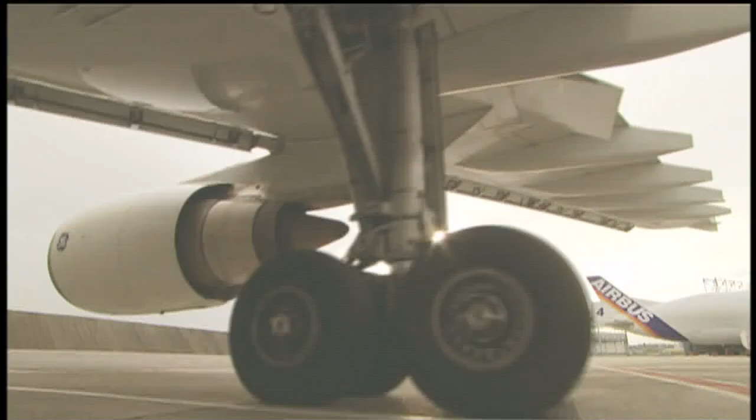For me, all airplanes are fascinating machines. So being in on the birth of one of the most amazing planes ever conceived is a real dream come true. Get ready for a hair-raising story of ocean-going ships, 96-wheeled trucks, and a flying monster called the Beluga. The latest technology at the mercy of the winds, the tides, and a tape measure. Are you ready for takeoff? Then here we go.

Imagine an airplane that holds almost 600 people. Imagine an airplane with space for showers, stores, and bars. Imagine an airplane that could change air travel forever. Get ready, because that dream is about to come true.

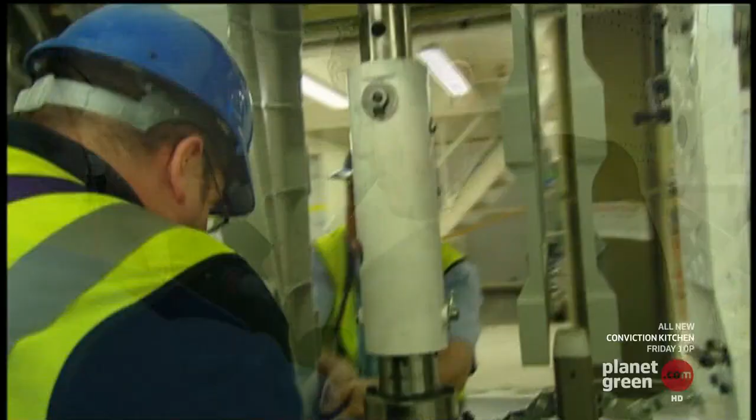This is the inside story of a multi-billion-dollar gamble. A game of high stakes, high technology, big machines, gigantic buildings. The creation of a new breed of airplane, bigger, more powerful, more luxurious than anything you've ever seen. A battle for the skies.

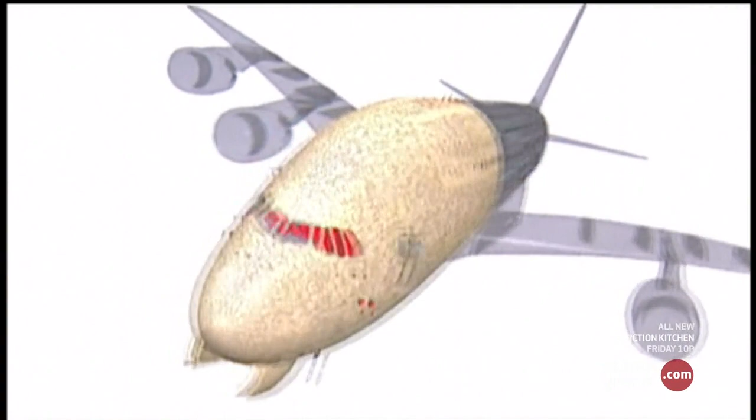The Paris Air Show, France, June 2003. For people who build airplanes, it's the most important event of the year. Far away from the sweating crowds and the spinning stunt planes, one man walks through the VIP area. His name is Charles Champion. On his shoulders rests the fate of the company known as Airbus. What is at stake, I would say, with such a program is basically the future of the company, as such. Really? Really.

Just two companies produce almost all of the world's large airliners. One is Airbus, and the other is Boeing. The two have been locked in a deadly battle for years. Now Airbus want to overshadow Boeing's entire product range and build a machine that will make the legendary 747, the jumbo jet, obsolete.

This is John Leahy. He's got the tough job of selling 250 planes at $265 million each. And that's just to break even. Pressure? Of course there's pressure. When you're spending $10.7 billion, of course there's pressure. When you're designing an aircraft that's bigger than any that was ever produced in the history of mankind, of course there's pressure.

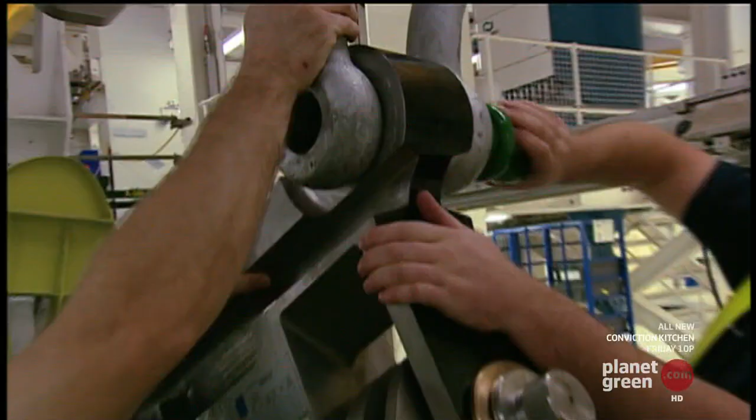They've set a tough schedule. Just 20 months till the first takeoff of the biggest airliner in history. A year and a half of pressure, stress, and sleepless nights. Witness the first installment of this incredible challenge. The race to build the enormous parts for the new machine, carry them thousands of miles across oceans, along rivers, over land, to where they'll finally be assembled. There's just 87 weeks till the big bird flies.

Broughton, Great Britain, November 2003. It's 6:30 in the morning. Inside this brand new factory, Simon Shingler and his team are about to venture into the unknown. I don't want anyone to get complacent. We need to make sure we're concentrating on what we're doing, or else there will be a likelihood we'll bend something or hurt someone. We can't afford for that.

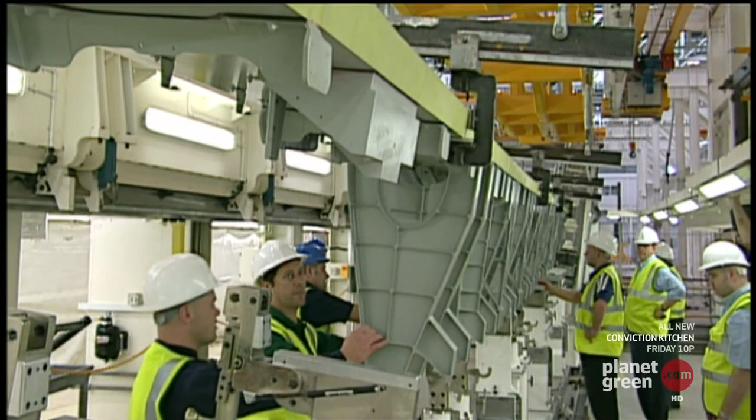Here, over the last 5 months, more than 350 engineers have been working day and night, constructing the world's largest airliner wing. 119 feet long, it's been painstakingly built up lying on its back edge. It looks more like a ship than part of a plane. High-capacity, radio-controlled cranes are used to maneuver the components into position.

Today is the day they lift the complete wing free of its supporting framework and get the chance to see the entire enormous structure for the first time. What's going on in front of you? The whole idea of having you all there is to make sure that you're all concentrating on your one specific station, right? And that's how we're going to ensure that we're going to take this wing out without anyone hurting themselves or without the components getting damaged.

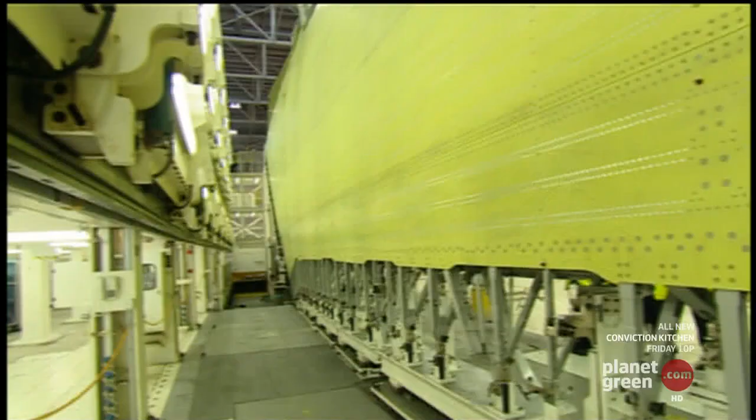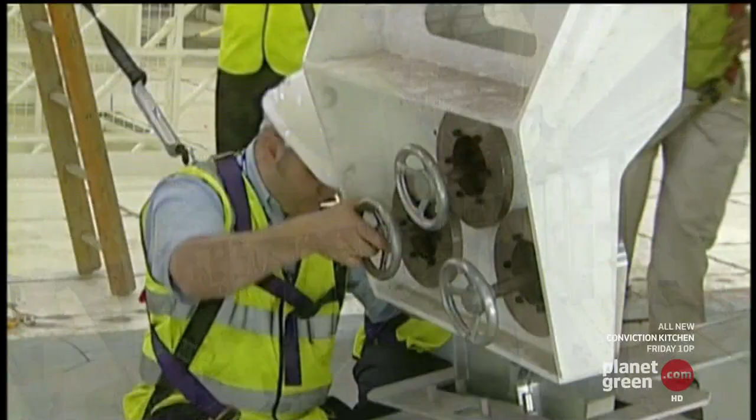The wing, although longer and heavier than two 18-wheelers parked end to end, is made to a tolerance of less than half a millimeter. To damage it now would be a disaster. Everybody gets very excited, and it's easy to sort of leave one of the attachments in place or part of the tooling because there's so many attachments around the periphery of the wing. If that happens, then it causes damage when it's being lifted.

Mark Burrows has been on the project for 8 years. Today, he gets to see the fruit of his labor. Well, it's a big achievement, really, after such a long time of development, conceptual development, bringing everything together.

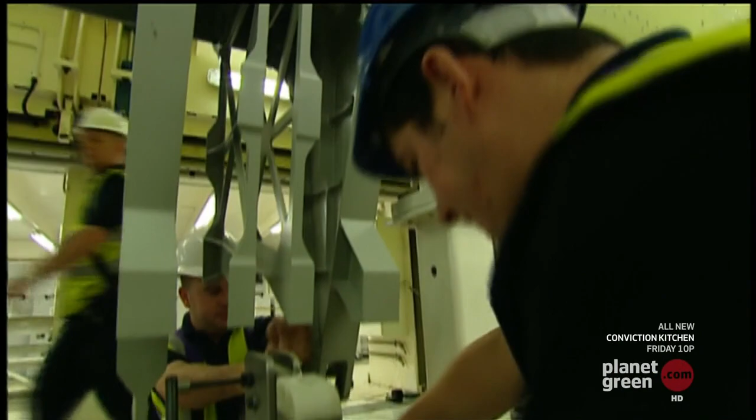Makes a big occasion for everybody. But raising 30 tons of aluminum and carbon fiber is not a task to be taken lightly. All the mobile phones are turned off. Right.

The nerve center of the company is in Toulouse, a small city in southwestern France. From here, Charles Champion controls nearly $11 billion worth of high-tech investment. If he fails to deliver the plane on time, it could be the end of Airbus. The buck stops with him. Airbus is riding on this, yes, definitely.

Building such an aircraft, it's a bit like climbing a mountain. You see the mountain in the distance. It looks high, but not too high. And you start walking, and you got the first level, and then you say, "Whew, this one was hard." And you got the next one. It's even harder. And so you see the summit. It's getting closer, but at the end of the day, there's still a lot to walk and a lot to climb.

You can't just build the world's biggest airliner. You've got to sell it. To do that, Airbus has built the mother of all showrooms. This purpose-built complex is filled with full-size demonstrators of each of its planes. And in pride of place is the A380.

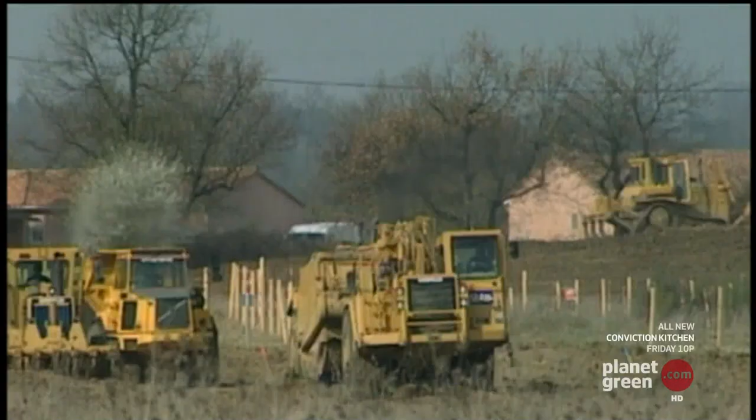To build big planes, first you need big buildings. And since the year 2001, vast new factories have been springing up all over Europe. The British wing factory took 2 years to build. The foundations go down 105 feet to support the massive assembly machinery. But Britain contains only a part of the operation.

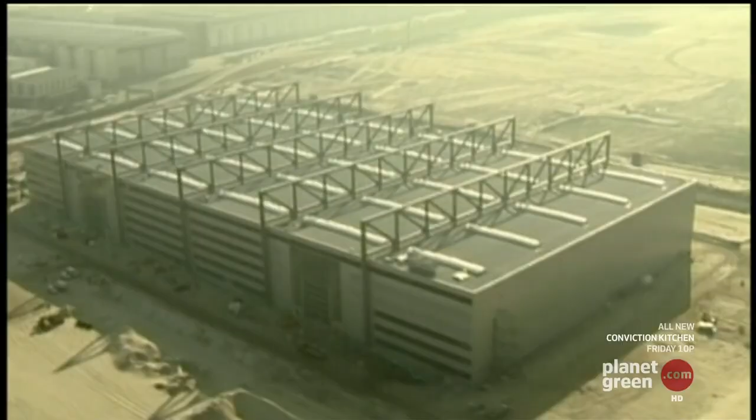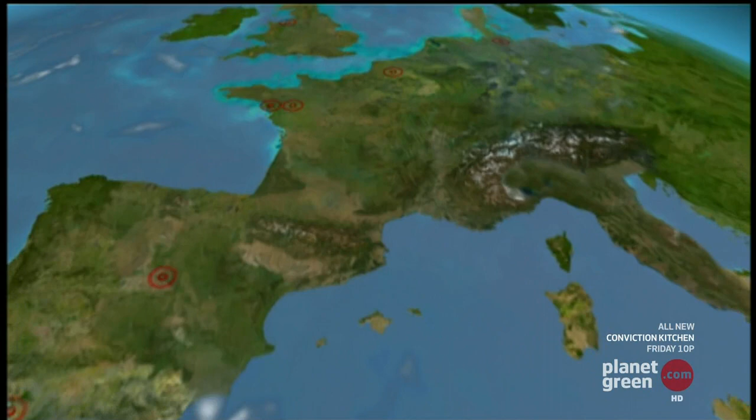500 miles to the east, over in Germany, just outside Hamburg, another massive facility has been built on land reclaimed from the nearby river Elbe. Here's where most of the huge fuselage will be assembled, stitched together from parts made all over the world. There are also factories near Paris, in western France, and in south and central Spain. All are gearing up to produce parts for the new giant.

It's a truly global effort, with tens of thousands of people involved. It's big, it's really big. You name it and the people are working on it. So at the end of the day, it's almost impossible to count the number of people working on this project.

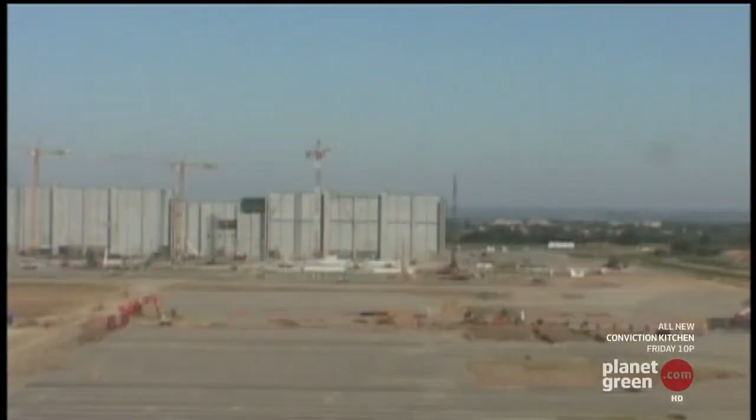But the new factory in Toulouse is the daddy of them all. The final assembly line is where the various components of the plane will be joined together to create the finished airplane. Work began in 2001 on a complex that would cost $436 million on its own. There's enough steel here to build the Eiffel Tower 4 times over.

The factory is split into bays. The roofs hoisted into place, complete with lighting and fire control systems already installed. 1/3 of a mile long, 270 yards wide, it covers 24 acres, big enough to hold 8 planes at once. Ultimately, it will produce one new A380 every single week of the year.

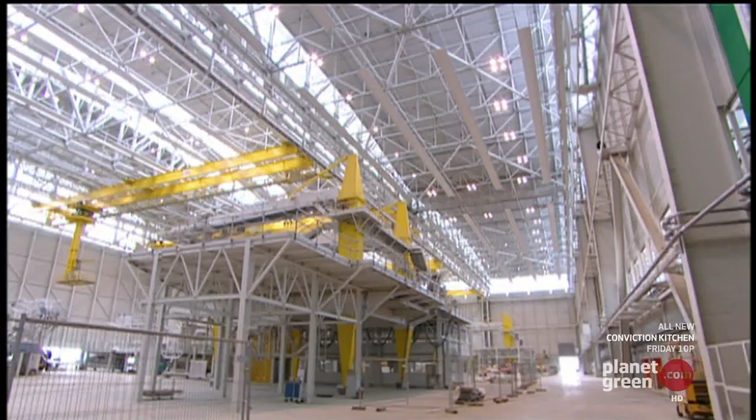An exciting, perhaps daunting prospect for the man who has to sell them. Everything's scaled up. If the airplane's big, the tools must be big. The building must be big. And just think, you look around here, you're looking at a construction site now, you look at those massive cranes up there that can move big fuselage sections around, but in a few months, when we're back here, you'll see

an airplane coming together. What we have to do now, after the orders have been taken, the contract's done, the money's been put down, we have to make sure that we deliver on what we promise. And that means we have to have not just world-class engineering, but world-class manufacturing as well.

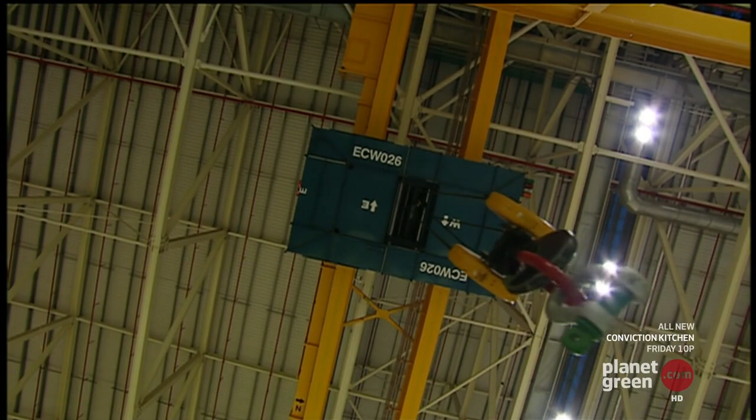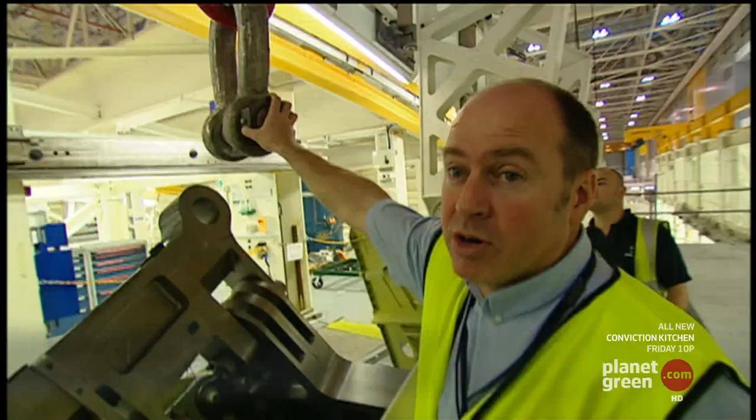Back in Britain, that manufacturing process is well underway. They've reached a critical stage in removing the wing from its frame. Alan Ferguson is in charge of attaching 2 cranes to the solid titanium lifting points on the 30-ton wing. We're making sure we get the crane correctly aligned with the lifting attachment, so as when we make the initial lift, we don't get any sway on the wing. So it's critical, yeah.

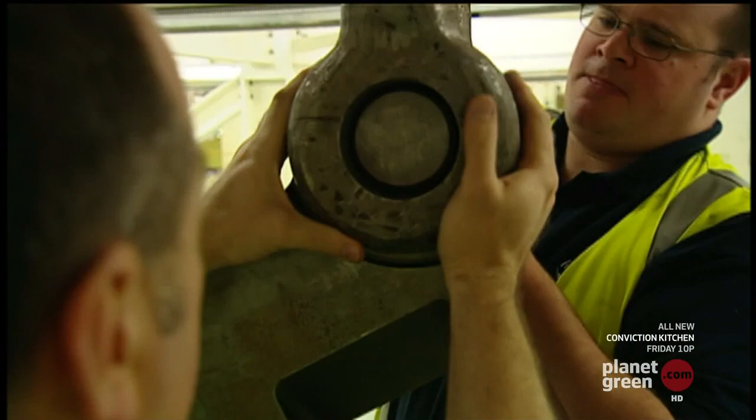With both cranes properly aligned, the lift itself can now go ahead. They've rehearsed the operation many times, but only in a computer. Within half an hour, they'll find out if their simulations have been correct. A multi-million-dollar wing depends on it.

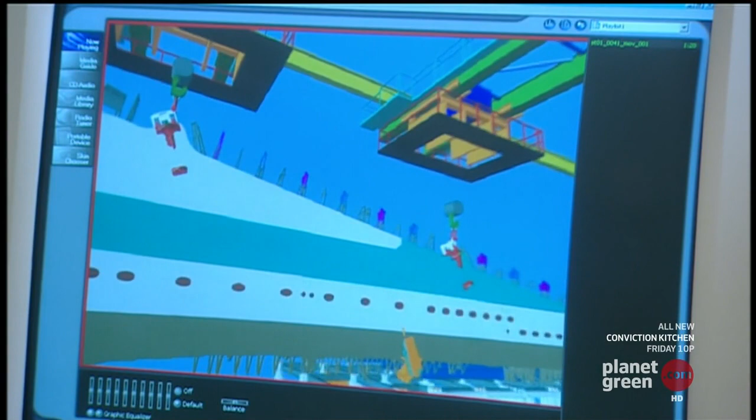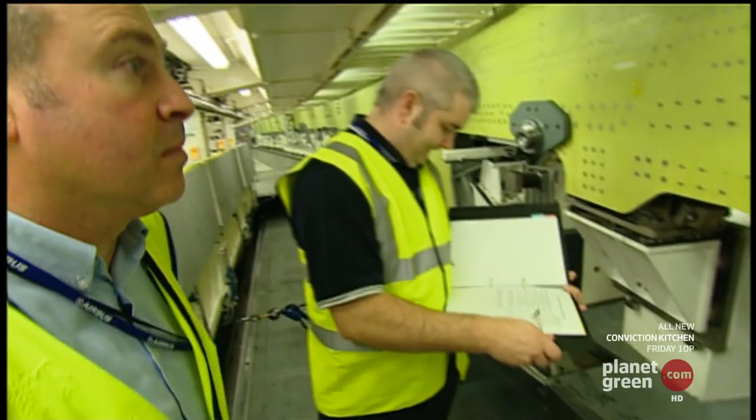As the biggest civil aviation project in history gathers momentum, Alan Ferguson and Simon Shingler face a huge challenge. They're about to lift a 30-ton wing out of its assembly jig and lay it flat for the first time. 3 hours into the operation, they're at a critical point. Mistakes at this stage could cause a lot of damage, and because of the sheer size and weight of everything, we need to make sure we've got everything covered safety-wise.

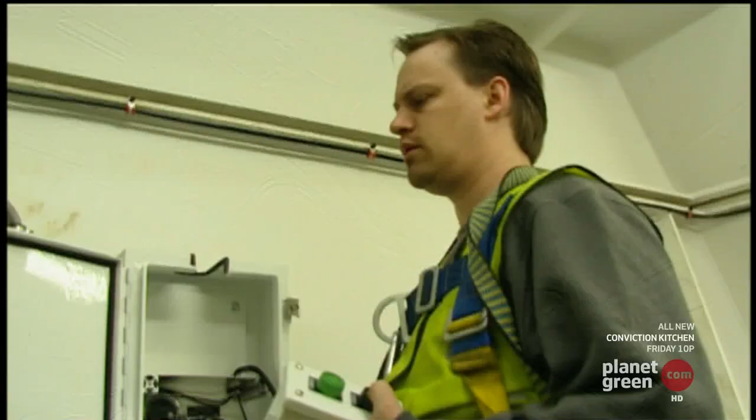First, they need to free the fuselage end of the wing, using compressed air to retract the huge steel clamp that holds it in place. But there's a problem. No matter how many times they try, the clamp won't release fully. After several checks, they work out what's wrong. A forgotten bolt is in the way. It's a frustrating glitch for Alan. Everyone ready? Going back. The clamp is off, but it's a delay that Alan could do without.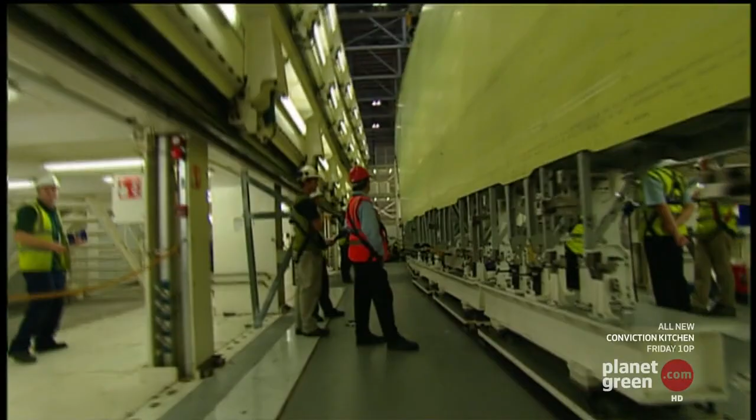Right, gather round please, gents. The operations team and the crane driver is going to take some weights, we're going to release the front spar, and then we're going to remove the wing. Try to stay calm, don't panic. We'll do everything nice and slowly, there's no rush now, but once we start, we're not stopping. Thanks very much. All right, you're clear, take it off. Get that spar support out, please. Is it down? Right. Yeah?

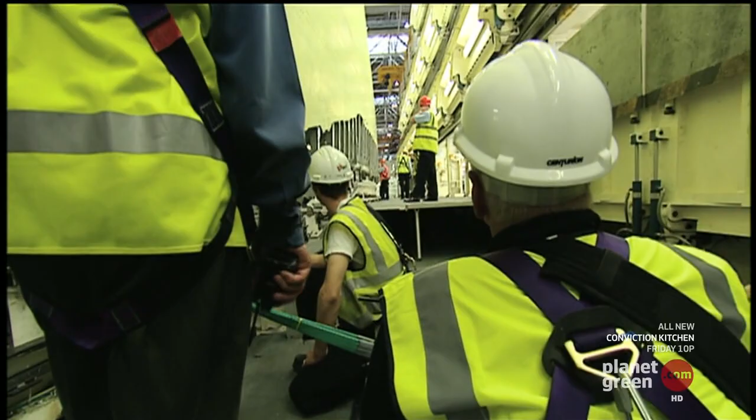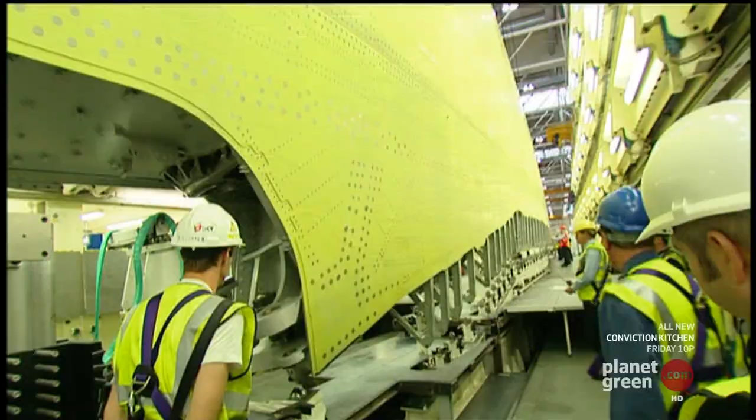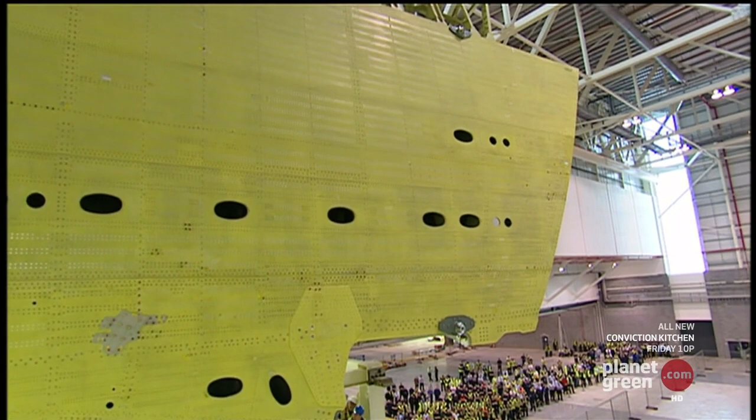With one small movement, the wing is free. We're clear. I think the wingtip's cleared. Yeah. Now it can be lifted clear of the main jig and into the next hall. Don't forget the outboard end. For the team, it's a dramatic climax to 3 years of hard work. I'm feeling elated. Might not look it, but inside I'm quite excited. Well done, Jim.

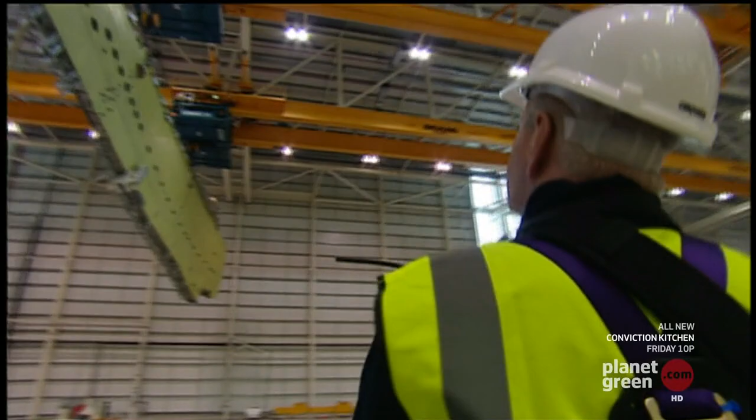The wing may look big now, but once the moving parts are fitted, it will grow by half as much again. And it's only one of a pair. The true size of the finished airliner is starting to show. We've got something here to be very proud of that we hope will keep us in work for a long time in the future. I think the whole world's going to look on in awe the day it flies. I think the Boeing Aircraft Company have got something to be very wary of.

But even as the wing is lowered into horizontal position for its final assembly, the finer points of the A380's design are still far from finalized. The schedule is so tight, there's no time to build 1 or 2 aircraft, test fly them, make adjustments, and then carry on. Modern computer design and simulation techniques mean that everything is happening at once.

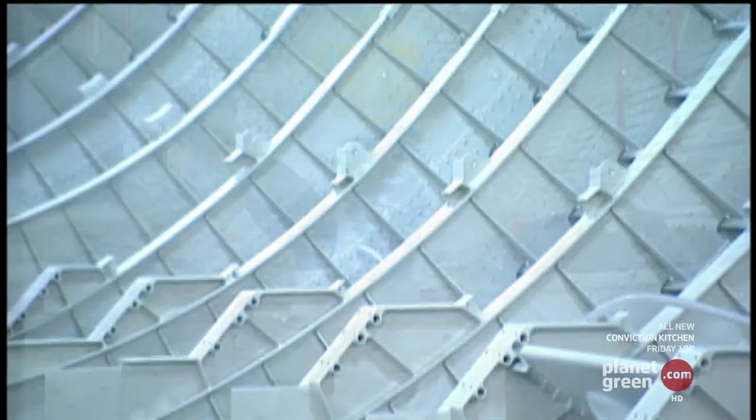In Hamburg, in the massive new hangar built to assemble the sections of the fuselage, work has already started on the parts for the first 6 aircraft. Even though it will be over a year before the first A380 is in one piece, let alone racing down a runway. The fuselage is built up from aluminum panels stitched together with thousands and thousands of rivets, fitted mostly by hand.

Parts come from all over the world. Floor beams made from ultralight carbon fiber are from Japan. The entire tail section is also carbon fiber, made in a state-of-the-art facility in Spain.

Everyone at Airbus is feeling the heat, especially those at the very top. With a project lasting years, everyone must find their own way to deal with the inevitable stress. This is a marathon endeavor, and overall chief Charles Champion clears his head by running whenever he can.

It's a question of time management, not only time management at work, but also time management with your personal life. And you can burn out. Basically, if you're not careful, you just can burn out, and at the end of the day, you're out. Can we start?

The pressure comes to a peak every 2 weeks, when the heads of each department gather from all over Europe to report on their progress. It's a tough environment that has seen firings and resignations. Andreas Fehring has recently been brought in to replace the previous head of interior engineering. It's particularly tough because he's inherited a department that's 3 months behind schedule and over budget.

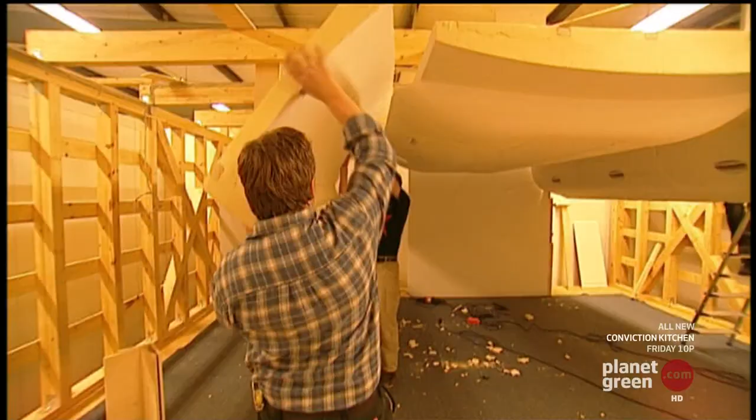This discreet, unmarked warehouse is where the brand new cabin will be born. Here, in private, is where Airbus and the airlines can agree exactly on how the inside will look. Now let's enter inside what we are doing over here. The workload is massive. Each airline wants a customized interior, so Andreas has to engineer dozens of unique features to keep them all happy.

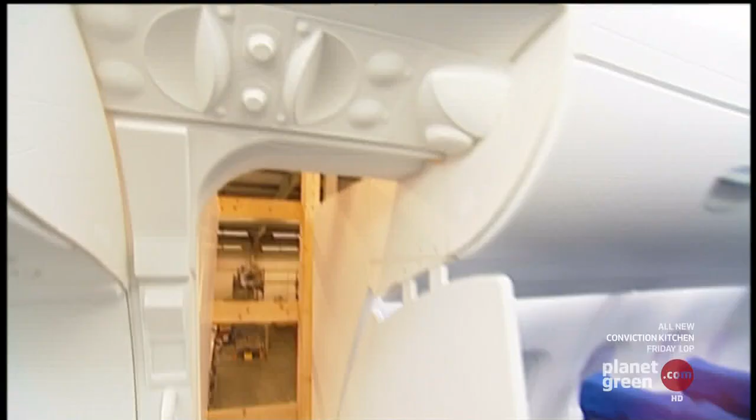When you are discussing with the customers, you don't show him a mock-up of the wing or a mock-up of the vertical stabilizer or something like this. You show him a mock-up of the cabin, giving him the impression how it could look for his customers, the area where he is earning the money. You can change the lighting area over here. You can have green light, you can have blue light.

Andreas has the difficult task of turning the airline's high expectations of showers and the like into reality. We will have showers on our aircraft, but not in the way they are displayed at the moment in Toulouse, because these are sorts of designers, not of engineers building the stuff. Here at the moment we have...

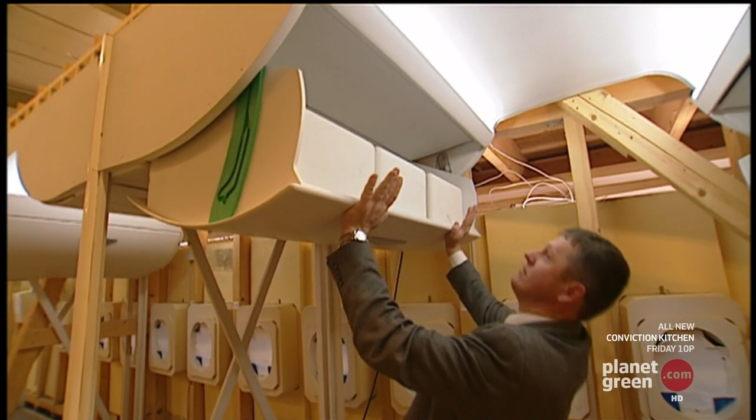The overhead bins have to carry a load of 110 pounds. They're a major headache for Andreas. The loading limitation of these bins is 50 kilos or 60 kilos. So you can imagine that if you have a stewardess or a passenger trying to move 50 kilos like this, they are not that strong, and it is a difficulty.

Nearby is Airbus's top-secret research facility, where technicians strive to find solutions to these problems. They've come up with a prototype electric bin, but nothing is ever straightforward.

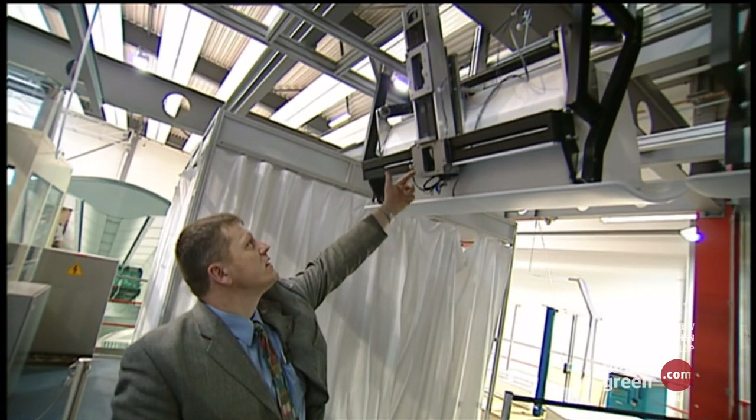For closing, you push again, and the thing is closing. It's a very simple item, but if you go now to the rear of this feature, you can see that the device which is used over here with all these specific belts and mechanical devices or electromechanical devices is something which will be very difficult to integrate. And of course, it's a very weight penalizing equipment.

The bins are just one of hundreds of items that Andreas may soon have to make real. You will smile, I'm sure. Have you ever seen it before? No. Come in. Head of Cabin Development Herman Schott is showing off a bar that fits into the cargo area. Wow. Is this for an aircraft or is this for an undersea boat? I'm sure if you show this to a customer, he will buy it immediately. But we need to be sure that what we show to our customers is really something which we can manufacture as well.

What is really needed is time. Time. With the first set of wings nearing completion in Britain, and the fuselage parts almost ready to leave Germany, time is the one thing Andreas Fehring does not have.

The design of the new Airbus A380 goes back a long way. Philip Jarry was one of the elite team involved from the very beginning. I think it was in '88 where there were the first meetings, very secret meetings, between very few people in Airbus who said, well, if we had to imagine a very big airplane, let's say 500 or 600 seats, how would it look? If you pretend to offer to the airlines, the major airlines of the world, a top-class, top-efficient airplane, you cannot compromise. As simple as this. So it has to be a fully new design.

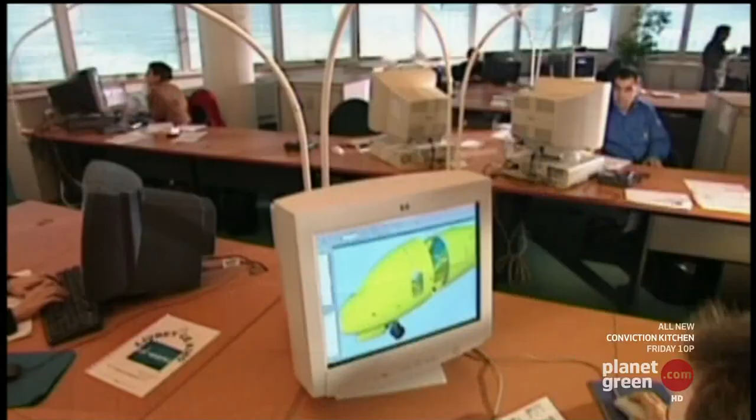Soon there were hundreds, then thousands of engineers, technicians, computer specialists, and aerodynamics experts toiling round the clock to create a plane like no other. The new machine would have 2 full-width decks, with 49% more floor space than the Jumbo. The airlines told us, don't be shy, don't hesitate. Of course it has to be big. It has to be bigger than anything that is flying. So don't be shy, don't hesitate. Make it really big.

But there was one more factor the team had to contend with. A monster that's long cast its shadow over the entire operation. This is the Beluga, the extraordinary, some would say freakish cargo plane, custom built by Airbus. There are planes that can carry more weight, but the Beluga has everything else in the world beat when it comes to volume. This machine can swallow a load 16 foot wide by 16 foot tall by 70 feet long in one gulp.

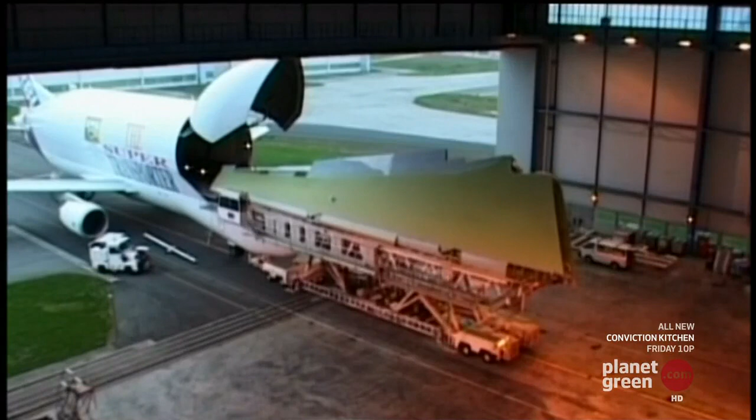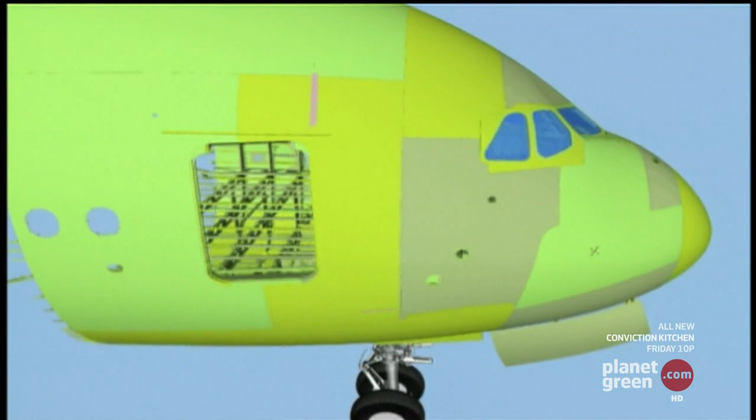The Beluga is vital to the way that Airbus works. It's used to carry components from factories all over Europe to the final assembly lines in France and Germany. On average, this industrial powerhouse produces almost 1 airliner every day. It's a complex system that ensures one weird fact. An Airbus jet has already flown thousands of miles before it's ever taken off. But when it comes to the A380, there's one huge problem. None of the supersized parts would fit inside the Beluga. In fact, the Beluga could fit inside the A3XX. So we had to think of something completely different.

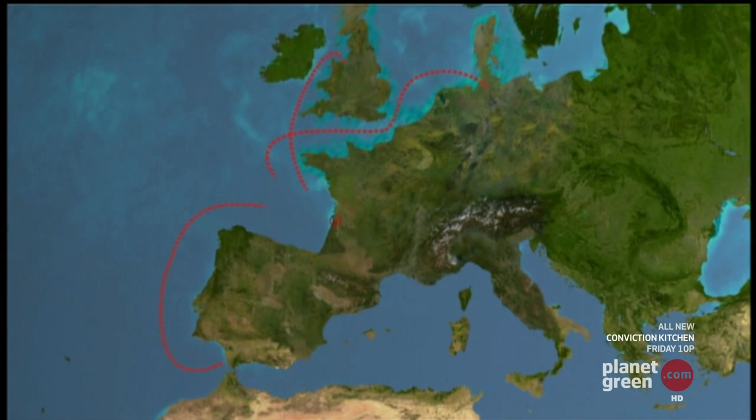The team devised a system that uses roads, rivers, and the sea in a logistical dance that has to fit together perfectly and work first time. The fuselage, wings, and tailplanes will set off by sea from Hamburg, Wales, France, and Spain, converging on the port of Pauillac on the west coast of France. From there, they are loaded onto barges that will carry them 59 miles up the River Garonne. And still, the journey is not complete. A fleet of trucks will haul the parts by road the last 152 miles to Toulouse.

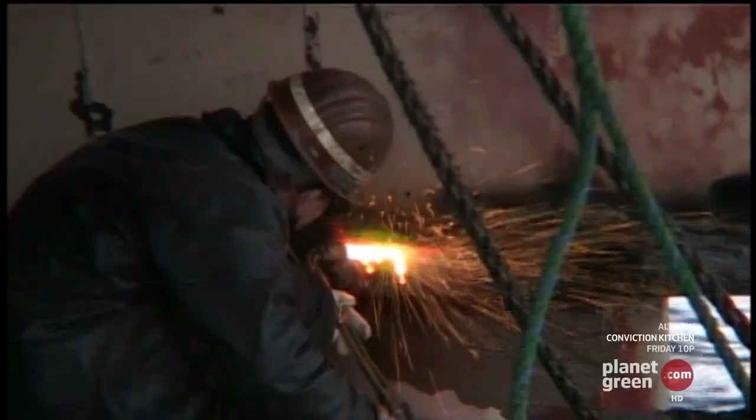Airbus have commissioned a custom-built ship from China to carry the parts, but it won't be ready for the first transports. Instead, they've hired a general-purpose cargo vessel to ship the first fuselage components from Hamburg. But even that is having problems. They've discovered a 3-foot crack in the rudder and must repair it before the 30 tons of airplane can get underway. The repairs stretch long into the night. As ever, the clock is ticking.

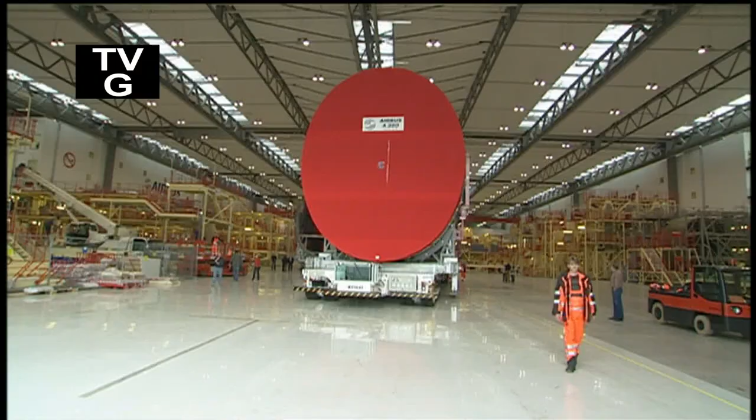Hamburg, Germany, early morning, and the first finished fuselage sections of the biggest airliner the world has ever seen emerge into the light of day. The parts are carried on purpose-built, radio-controlled, self-powered low-loaders. Each one has 96 wheels and can travel at a maximum speed of only 6 miles per hour.

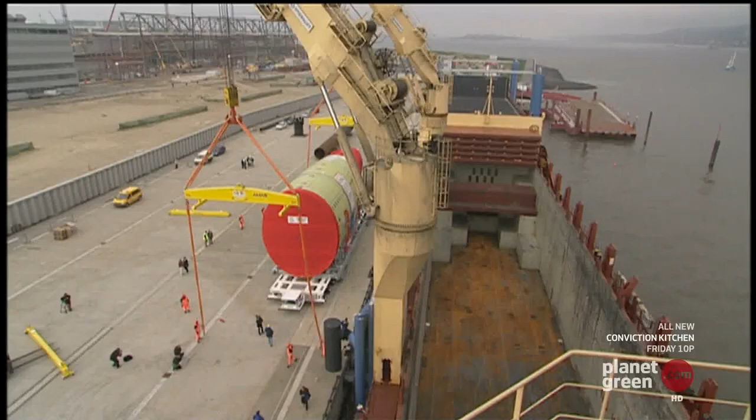The factory is just a few hundred yards from the purpose-built dock where the cargo ship waits. Engineers finally finished welding the rudder at 3 o'clock the previous morning, and now is the time for these outsized parts to start their 970-mile journey by sea. They're gonna have to make good speed if they're to recover the time lost to the delay.

In Britain, another early start, as another massive plant is about to release the components built within its cavernous interior. Gareth Williams is in charge of the operation. For him, today is a big day. After the last 2 months of preparation, the previous 2 years of planning, we've actually got the moment now when the wing's going. So it's an exciting time, and it's what people here have looked for many, many months.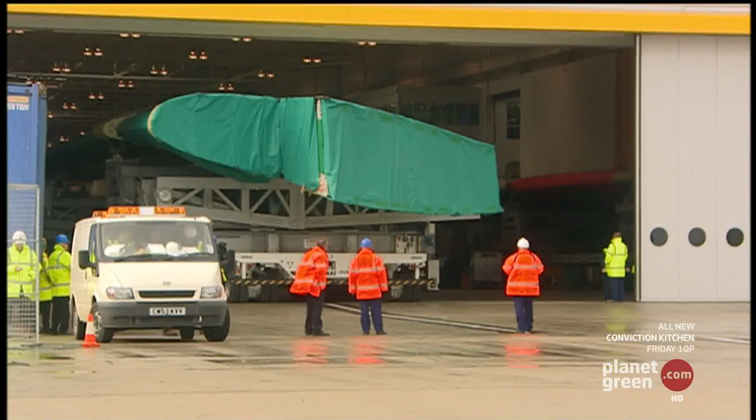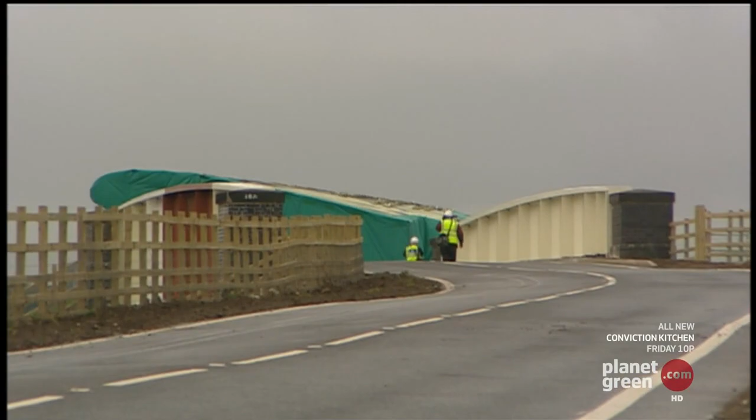Stage 1 of this 1,000-mile trip is to get the wing from the factory to the nearby River Dee, where the giant piece will be loaded onto a barge. Again, a low loader is used, but this one is modified. The truck has to pass over a narrow railroad bridge, and to prevent a collision, a special guide wire has been built into the road to ensure the truck doesn't hit the bridge. As the truck approaches, they are depending on the system to work. If all goes to plan, the clearance will be a matter of inches.

The high-tech system works, and the next phase is to load the wing onto the barge. Now the dangerous tides on this treacherous stretch of river are their biggest headache. It's not to be messed with, this river. The tide's important because downstream there are 3 low bridges, and beyond them lie constantly shifting sandbanks. Sail when the tide is too high, and the barge will hit the bridge. Wait for it to fall, and they could easily run aground. There's a real balancing act as to where you get off the blocks and get under the bridge.

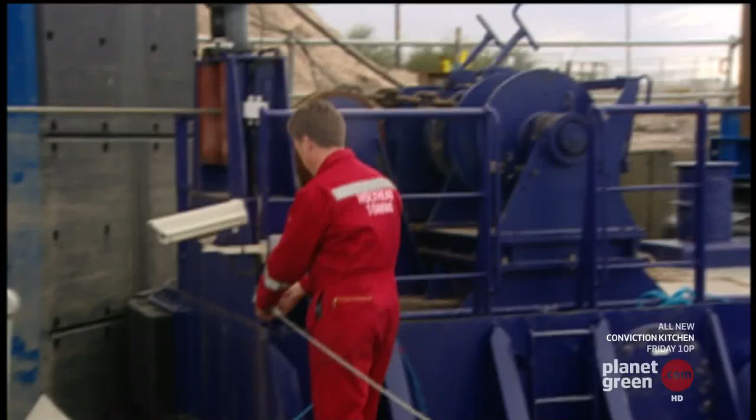Graham Harwood, the barge captain, has been studying the river for the last 4 months. He's planning on clearing the first and lowest bridge by just 19 inches. We've got to have half a metre clearance under the bridges, so the timing is of the essence, you know. Neither is this the best time of the month, with the current running particularly fast. They haven't picked the right time for us because the tide is making probably about 5 knots. And we've got to compete with that later on. So not the best time of year, not the best tide for the first time it's been done. But I'm sure we will manage it. We'll have to.

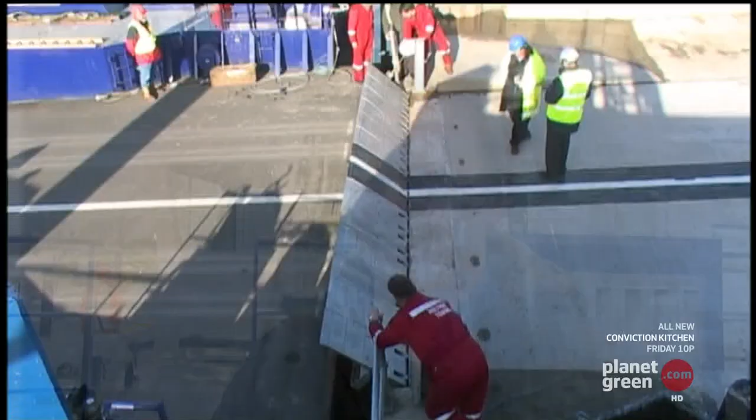At last, the wing is gently maneuvered onto the barge and the low loader carefully retracted. It's time to put all the theory into practice. The crew are constantly monitoring the clearance under the bridge. But as they approach, they realize the strong wind is holding the tide back. They might hit the bridge too soon. We need to slow it down. So Graham holds off for a few more seconds. Yes, there it is. Look.

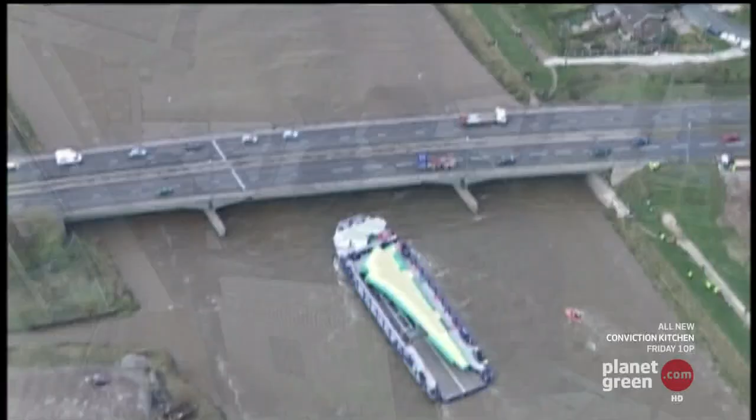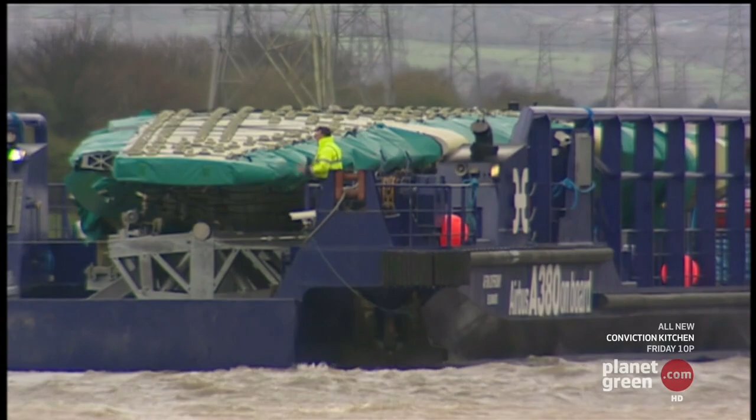That is nice. That is beautiful. Isn't that beautiful? Exactly 50 centimeters. Exactly. 19 inches exactly. Graham has judged it perfectly. Cutting it so fine under the bridges means he has plenty of water under his keel for the remaining 13 miles of river. Now he can rely on his extensive knowledge of the river's channels and navigate to the next way station on the wing's incredible journey.

Ahead lies another ship, a long voyage across the open Atlantic Ocean, and eventually the vast assembly hall in France. There's a long way to go. You know, I've been fascinated by flying since I was a kid. It's kind of what pushed me forward through life. And I'm sure that this new Airbus will inspire a whole new generation of kids to go for their dreams too. We'll be back soon.

Here in Toulouse, in southwestern France, is the final assembly hall. It's empty now, but not for long. In a few days, the construction of the biggest airliner in the world will begin. The Airbus A380.

But before that, the components still have a long way to go. The fuselage sections from Germany have been at sea for 3 days and are now approaching the west coast of France. The wings have been loaded onto a ship in Britain. Now they're well into the Atlantic Ocean. All these massive parts are heading for the port of Pauillac, where the next phase will begin.

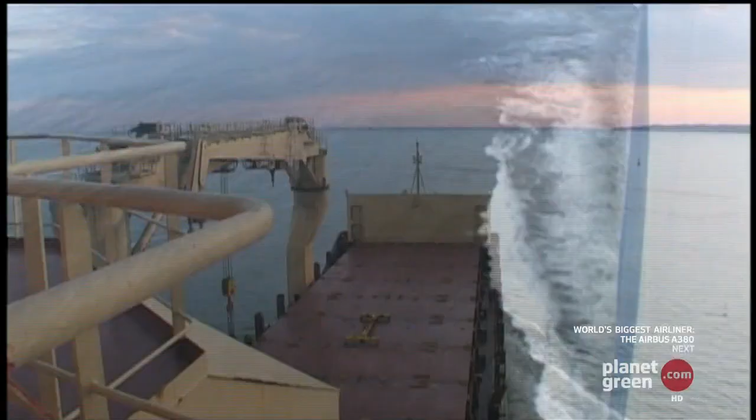First to arrive is the fuselage. Here the ship's Russian captain, feeling protective of his cargo, gets angry with the French dock workers for not being careful enough. What is this? This is very important job.

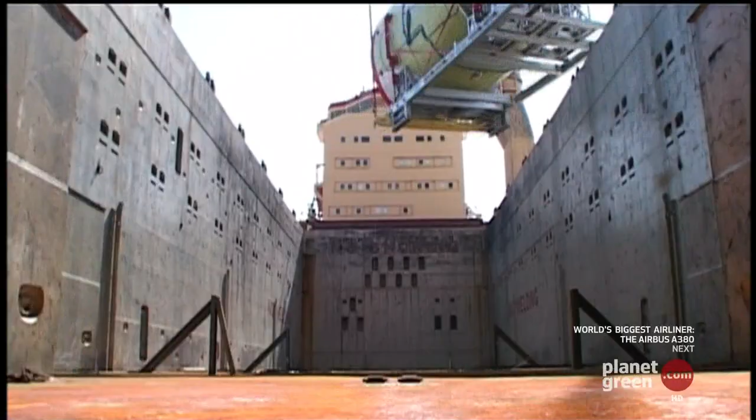Using yet more low loaders, the parts are soon transferred onto barges and begin a 59-mile journey up the mighty river Garonne. The trip takes in the ancient city of Bordeaux and its historic bridge, the 180-year-old Pont de Pierre. Here again, the clearance is minimal, only a couple of feet on either side. Barge captain Elie Blanchy has never carried anything like this before. It all goes to plan, and he clears the bridge easily, helped by state-of-the-art technology that allows the barge to partially sink itself into the water.

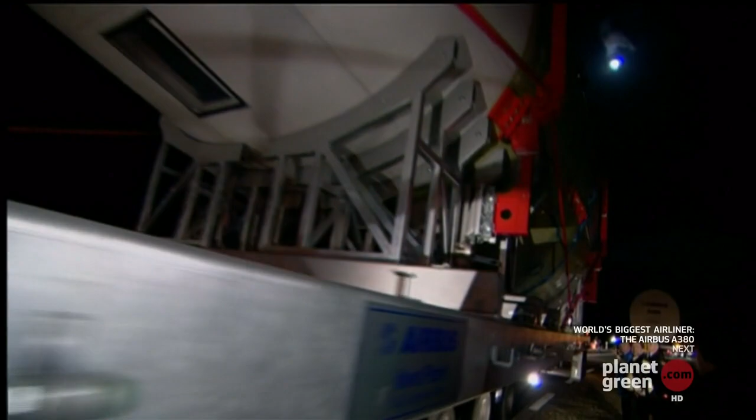Meanwhile, the wings have arrived at the dockside, and they too are loaded onto a barge and begin their journey up the river. The last stage of this incredible journey is by road, 152 miles to the final assembly line in Toulouse. The 3 pieces of fuselage are gathered in a gigantic convoy, each hauled by a 600-horsepower truck. To minimize the disturbance, they travel at night, winding their way through the French countryside on roads that have been closed off by the police. At this speed, the trip will take 3 nights, and now is the last and most difficult part of the journey.

Halfway along the final stretch lies the small village of Levignac. This is the narrowest point on the entire journey. The fuselage will pass within inches of people's homes. It's an event that's attracted massive public interest, and the police are taking crowd control very seriously. Daniel Boutonnet is the man who has to keep this huge show on the road. I'm confident, I'm not anxious, but for me, I would prefer to be 3 hours in the future. It's time to find out if the measurements have been correct.

By car ahead of the first truck, Daniel needs to keep the drivers warned of any hazards. His main problem is the hundreds of people that have turned out to watch the massive parts go by. I'm a little bit afraid by the number of people, and as the road in the street is very narrow, we can have some accident with people. It's what could be very dangerous. As they enter Levignac, the police are nervous and progress is painfully slow.

The delivery papers are signed, and once the wings arrive in a few days' time, Charles and his team will be ready to assemble the future of aviation, the biggest airliner in history, the Airbus A380. For some people, it's like a relief because they've delivered the final assembly line, they've done the factory, they've demonstrated the transport system. But for us guys, we are looking at the next steps: integration, first flight, then flight test phase, and then deliveries to the customers. Although they've come a long way, there's still a very long way to go.